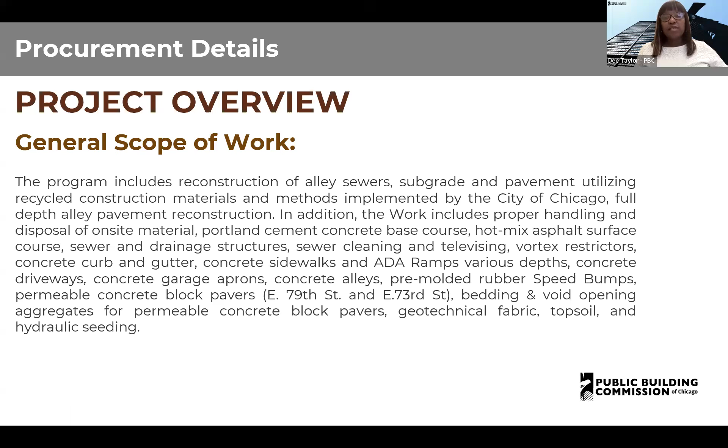The general scope of work includes reconstruction of alley sewers, subgrade and pavement utilizing recycled construction materials and methods implemented by the City of Chicago, full depth alley pavement reconstruction. In addition, the work includes proper handling and disposal of on-site material, Portland cement concrete base course, hot mix asphalt surface course, sewer and drainage structures, sewer cleaning and televising, vortex restrictors, concrete curb and gutter, concrete sidewalks, and ADA ramps of various depths, concrete driveways, concrete garage aprons, concrete alleys, pre-molded rubber speed bumps, permeable concrete block pavers, specifically at East 79th Street and East 73rd Street. Bedding and void opening aggregates for permeable concrete block pavers, geotechnical fabric, topsoil, and hydraulic seeding.

The contractor will be required to prepare a phasing and logistics plan within 30 days of the notice to proceed, also called the NTP, for review and approval by both CDOT and PBC prior to the mobilization and commencement of any work. The contractor shall also provide critical submittals, including sewer and drainage structures and pavers as applicable, within 30 days of issuance of the NTP. On-site construction work at each alley location must be completed within 45 calendar days from commencement of work for alleys without concrete block pavers and 60 days for alleys that include concrete block pavers.

The time of completion for this project includes 2 milestones and substantial completion. Schedule milestone number 1 includes pre-construction, including construction submittals, material and equipment procurement, schedule preparation and issuance, mobilization and utility coordination, and CDOT permitting for projects number 22961, 22962, 22963, and 22964. For this milestone, the contractor can start no sooner than August 11th, 2026, and must complete the project by September 14th, 2026. Substantial completion includes alley reconstruction and associated work for projects 22961, 62, 63, and 64. The contractor can start no sooner than September 1st, 2026, and must complete the project by November 27th, 2026.

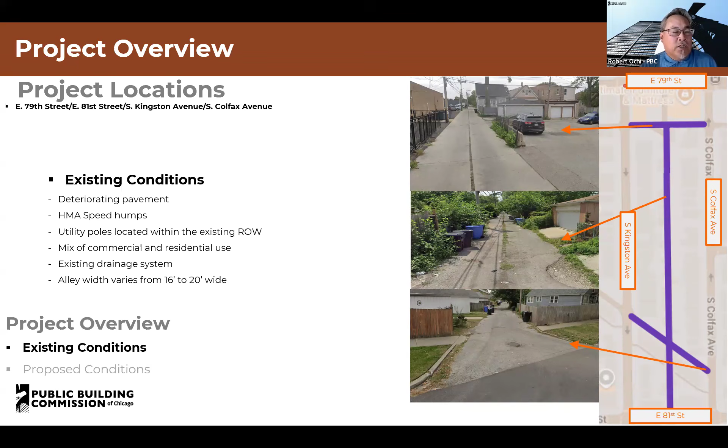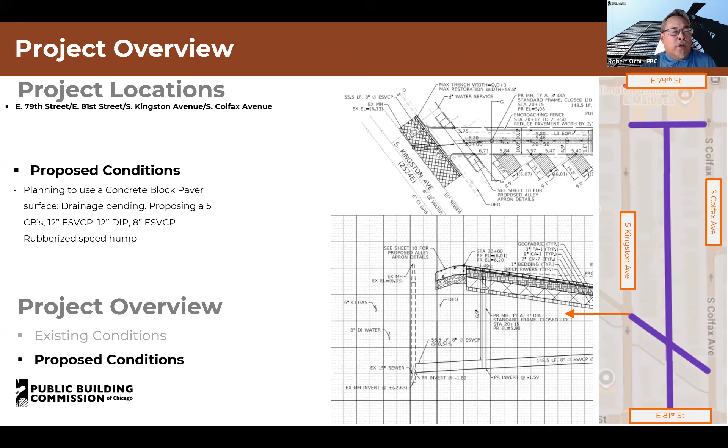So this is what we're proposing for the improved conditions for East 79th Street. Planning to use concrete block paver surface, drainage pending, proposing 5 catch basins. There's going to be a 12-inch extra strength vitrified clay piping, 12-inch ductile iron piping, and 8-inch extra strength vitrified clay piping. And we're going to also add rubberized speed humps. Those are the details shown.

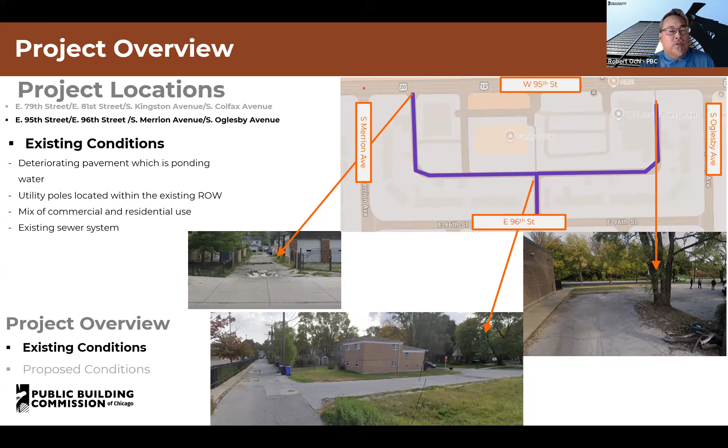For the next location, which is East 95th Street, the existing conditions are as follows. We have deteriorated pavement, which is causing ponding of water. Utility poles located within the existing public right-of-way. Mix of commercial and residential use. And existing sewer systems.

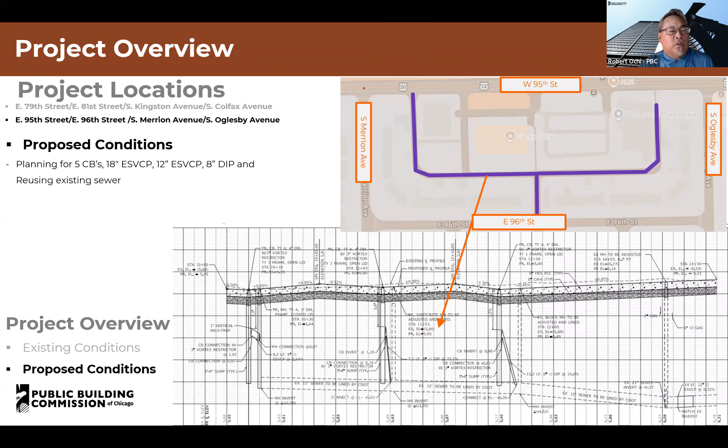These are the proposed renovated conditions we're proposing for the alley for 95th Street. So we're planning on installing 5 catch basins. We're going to be using 18-inch extra strength vitrified clay pipe, 12-inch extra strength vitrified clay pipe, 8-inch ductile iron pipe, and we're reusing the existing sewer system.

For the third alley location, which is East 108th Street, the existing conditions are as follows. We have deteriorated pavement and existing speed humps, utility poles located within the existing public right-of-way. We have residential use, and there is no existing sewer line system within this alley.

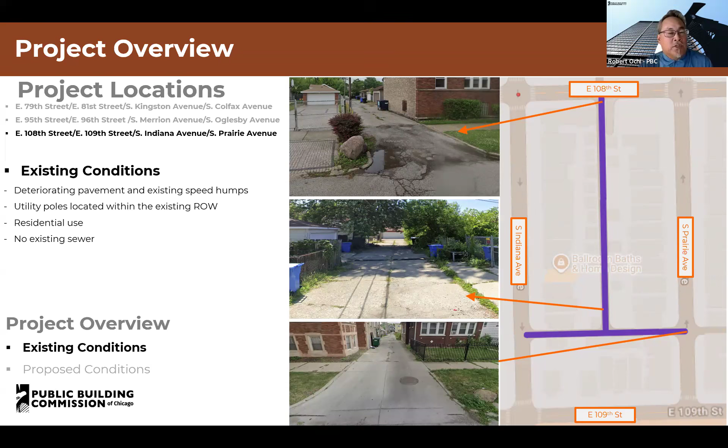So this is what we're proposing as part of the reconstruction. We're planning on installing 2 catch basins. We're going to be using 18-inch vitrified clay piping, 8-inch ductile iron piping with connections to a 24-inch diameter sewer on 108th Street. We'll be installing rubberized speed humps, and coordinating with Crown Castle to adjust manholes on South Prairie Avenue.

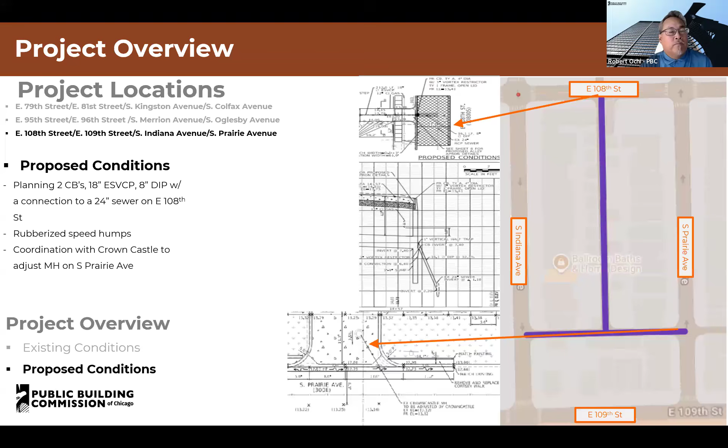In our final location, which is East 73rd Street, the existing conditions are as follows. Deteriorating pavement, utility poles located within the public right-of-way, residential use. There are no existing sewer lines, and existing HMA speed humps.

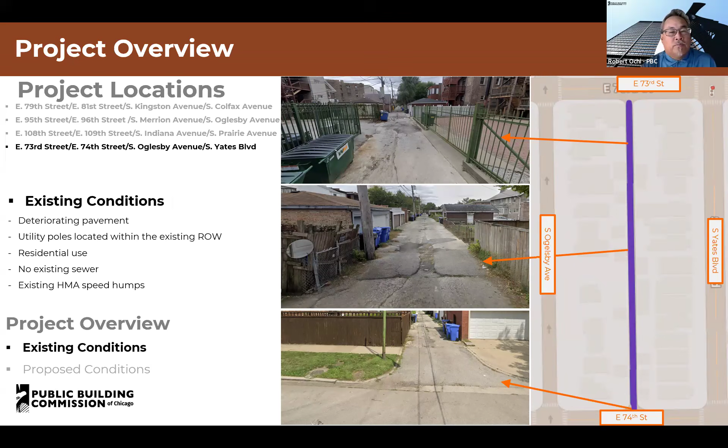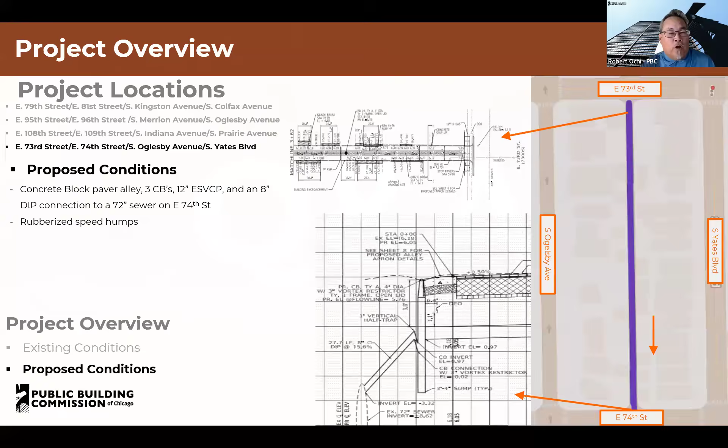So for the proposed reconstruction of the alley, we're proposing to use concrete block paver, with three catch basins to be installed. We're going to be using 12-inch extra strength vitrified clay piping and an 8-inch ductile iron pipe connection to a 72-inch sewer line on East 74th Street. And we will also be installing rubberized speed humps. So Dee, that's kind of an overview of all the alleys within this alley package.

Thank you, Robert. Okay, we have reached the portion of our meeting where we'll take any questions. This is our Q&A portion. Are there any questions for any of the presenters today? Confirming that there are no questions within the chat.